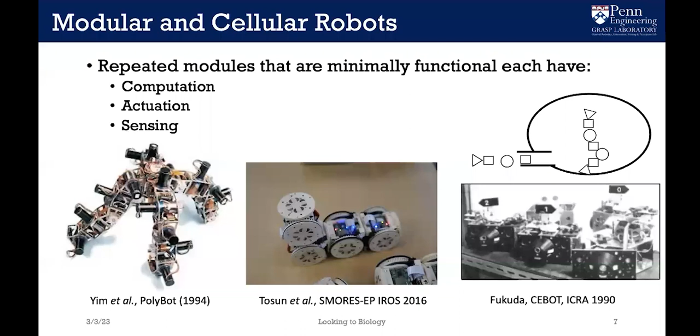Each module can do something by itself, but not very much, and it becomes much more capable as you add more of them together. So let me just show you a couple examples for locomotion.

Here's maybe 6 modules kind of hopping around.

These are another set of modules that you can roll like a loop, again doing different types of locomotion. It can also transform itself, open up, and move like a snake.

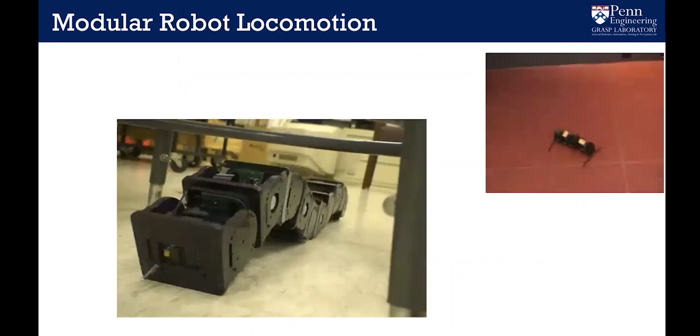I'll talk a little bit more about snake-like locomotion. You could also have a little 4-legged locomotion.

This is actually taking a snake-like form, and we put it in a gopher hole outside, this was when I was at Xerox PARC.

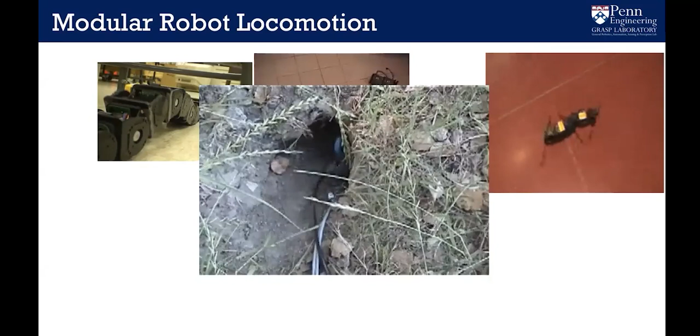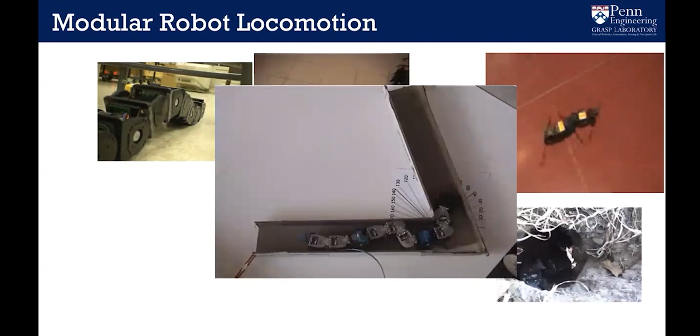The gait it uses inside that hole is called a concertina gait. This is blind, there's no force sensing or anything, it's just moving in a certain pattern and eventually able to make that sharp angle.

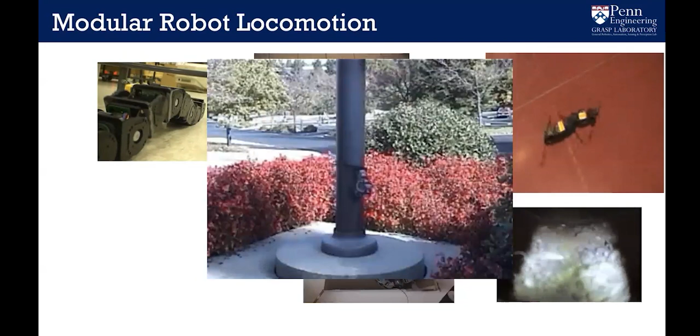It can also do a variety of climbing. Here it's climbing up a flagpole if you put the right attachments on the robot. It can also climb fences if you attach little hooks onto the robot.

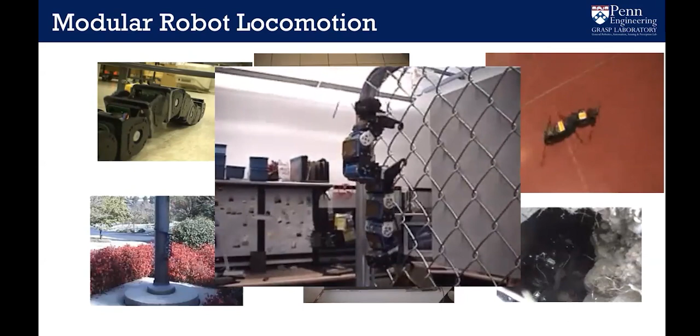Climb stairs. In this particular gait, it's conforming to the shape of the stair, and that one works quite well.

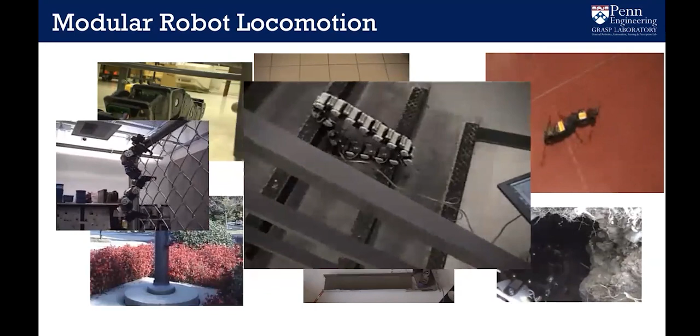This one is also interesting in that it's using human-like equipment, but it's not in a human form, which I think is important. You don't necessarily need to be in the human form to use human equipment.

A lot of times people talk about humanoids being really important because you want the humanoid robot to be able to use human equipment, but that's actually not necessary.

So this is what we call a 14-legged centipede gait. Sometimes I hear biologists say it's not a centipede, it doesn't have 100 legs. Well, centipedes don't have 100 legs either, but in any case, this only has 14 legs.

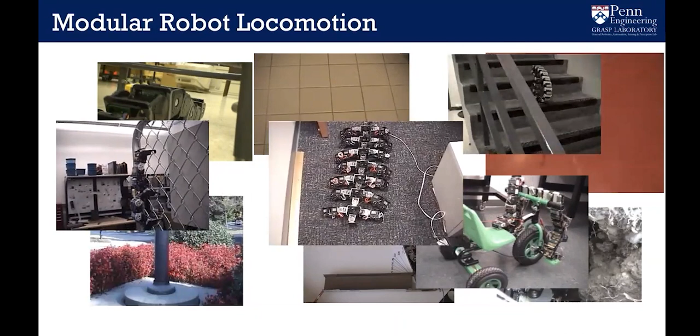The significance of this particular gait is that it's the largest number of modules we put together in a single system that could actually do something. It can kind of walk, and we'll talk a little bit more about that later as well.

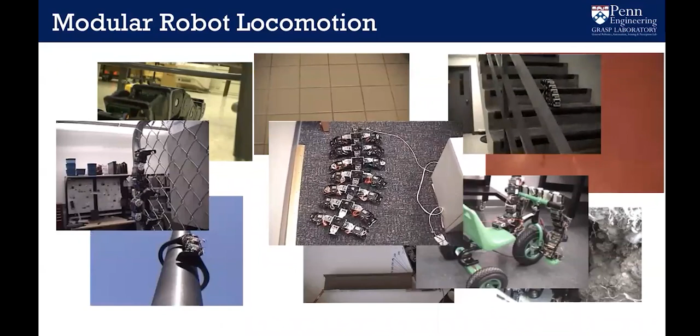All right, so we can do a lot of different things, and we've done hundreds of different gaits.

One of the things that when you have this type of robot, you could say it's kind of like Legos, you can build anything depending on what you want to do.

One of the things people often say is if you need a larger workspace, if you need the robot to have a larger reach, add more modules, you can make longer arms and increase your workspace.

If you need more strength, you could theoretically add more modules, put modules in parallel. They can distribute the weight or the forces for whatever you want to do. If you wanted more versatility, add more modules.

The number of configurations grows exponentially with the type of combinations you can do with modules. So more modules means more things you can do, but in reality it doesn't quite work out so well. When you have a larger workspace, you need larger strength. There's something we call characteristic strength, the number of modules a robot can support against gravity in a cantilever form. The characteristic strength of modules like we built is around 3 or 4, sometimes 5 or 6.

You could theoretically make them stronger by doing things in parallel, but the way we build them, it doesn't work that well. You could theoretically build a soft module that has some type of torque control, so you can actually share the load. The way people typically build these modules is position control, servos, relatively stiff, so when you put them in parallel, they don't work so well.

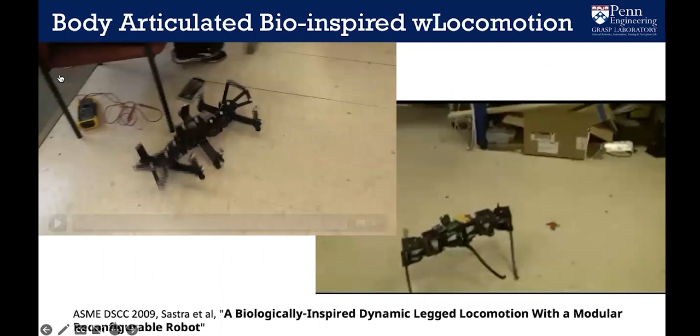Okay, so here is an example of a new type of more biologically inspired gait. In this particular one, it's just the spine of the body that's articulated, so it kind of moves maybe like a salamander or other type of lizard, but it's also dynamic. The legs are springy, so it's bouncing as it goes.

This is a version of that that didn't quite work so well. At this point, we're experimenting with different lengths and stiffnesses of the legs that were passive. It kind of bounces around, but maybe it's too high. So what's the right speed? What's the right stiffness? How do you do that? There's a lot of optimization you could do on this.

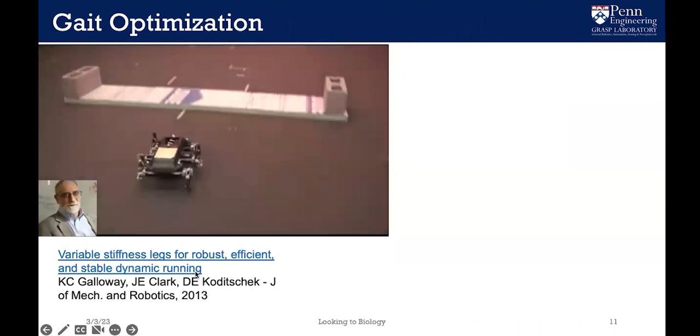So one of my students worked with Dan Koditschek on RHEX. This is a very old, famous robot called RHEX, Rex, with 6 legs that are also somewhat springy. How many of you have heard of Rex? Have any of you heard of Rex? A couple? Okay, so for those of you who haven't heard of Rex, this is kind of really cool.

Dan Koditschek worked with Bob Full out at Berkeley several decades ago, and they looked at cockroaches, studying how a cockroach climbs over obstacles really, really well. When they did high-speed video and analyzed it, a cockroach doesn't think about where it's pushing each foot as it goes. It just swings its leg wildly, climbs over obstacles, and it just works. It just bounces over things really, really well.

And so they realized they could do kind of the same thing. If you have the right motion with the legs, with a little bit of springiness, it just goes over unstructured terrain really, really well, and RHEX was one of the examples. So one of the things that was kind of interesting they did was figuring out how to find the right springiness.

They spent a little bit of time trying to optimize the gait and the stiffness. They had changing stiffness legs, all this kind of stuff. So Kevin Galloway, my student, worked with Dan using the Nelder-Mead optimization technique. They went through maybe hundreds of physical trials and then thousands of simulated trials, and they got something to work pretty well.

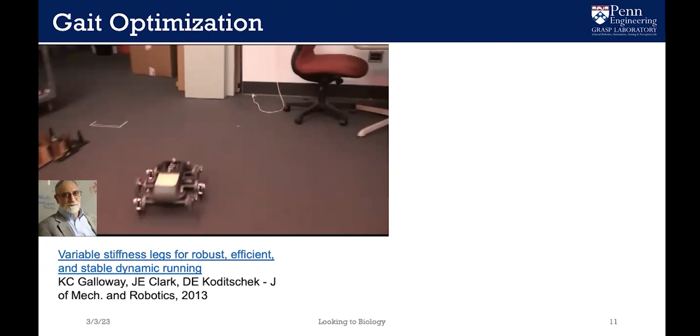In this talk, one of the things he showed was a quadruped doing, again, essentially gait optimization, walking around using a learning technique. One of the things they showed was that this robot could walk slowly, and as they speeded it up, it would naturally transition to a trot gait, and could go over different types of terrain, all kinds of things. That was pretty amazing, and one of the things I found interesting was what he talked about enabling this to happen, as opposed to what happened 10, 15 years ago.

Instead of having thousands of trials in an optimized gait or using learning techniques with large data sets that fed their model, instead of thousands, they had 100 million iterations. They have now the compute power and resources to do that type of thing, and once you have that, you can have much greater performance, which is kind of interesting.

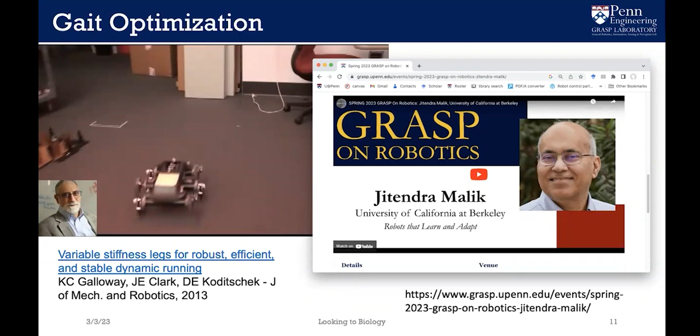Okay, so this is basically the structure I'm going to have. I'm going to talk a little bit about some robots, and then have a slide on what did we learn from biology. This is kind of my take on working with modular robots and doing a bunch of different gaits over the past couple decades.

We've done hundreds of different configurations. Most of the time, most of the configurations had less than 12 modules, usually like 5 or 6. The largest number of modules we had was the centipede gait with 45 modules, and that was just because we wanted to see how many modules we could put on a robot. How it worked was actually not very good — it could move in a straight line, kind of, but not that great.

One of the things I took away from looking at these somewhat biologically inspired locomotion gaits is that, in general, more modules led to worse performance. Essentially what you want to do is match the number — it's like an impedance match in electronics. You want to have the right complexity, the right number of modules or degrees of freedom that fits the complexity of the task.

So one fallacy, maybe, when you think about modular or cellular robots, is that like cells in your body — you have billions of cells but only hundreds of types of cells. There are lots and lots of cells, but it's not the same thing when you think about a modular approach.

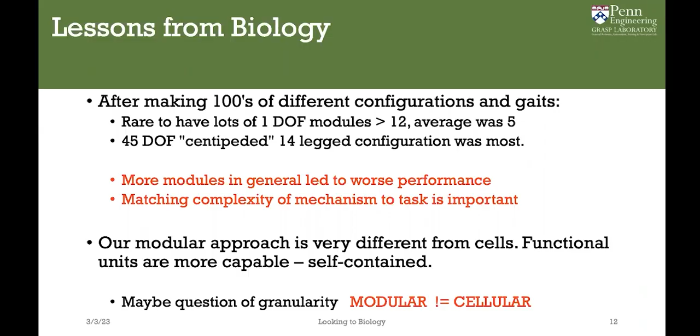Another thing when we think about modules is this particular gait where we had the tricycle with modules on it moving. This is another thing where it kind of worked — we got the video, but it didn't work that well. There are something like 20 modules on here; you only need maybe 2 or 3 degrees of freedom, but we've got 20 motors, and essentially every module here is like a muscle. In that sense, it's kind of like an octopus. So having all of the same type of module is not necessarily a good thing.

Octopi are really amazing animals. They can squeeze through areas and have very good ability to move around and do things like that. But they're really bad at lifting things, because, imagine, they have no bones.

Imagine I'm standing here and all my bones were gone — what would it be? I would be a puddle of flesh on the ground. I wouldn't be able to move, I wouldn't be able to stand or walk. Bones can be really useful when you want to do things like apply large forces and torques in an environment.

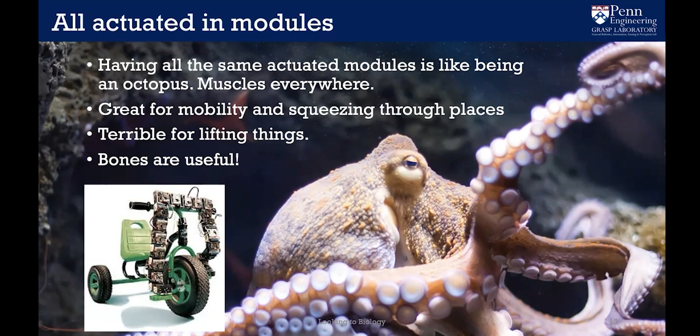Looking at that got us to think, well, maybe we shouldn't have modules in the sense we've done in the past. And that got us to start the thing I'm working on now, which is a little bit more recent, and an area that scales better: something we call truss robots, or variable topology truss. Essentially, what it's doing now is also what in the past has been called a variable geometry truss.

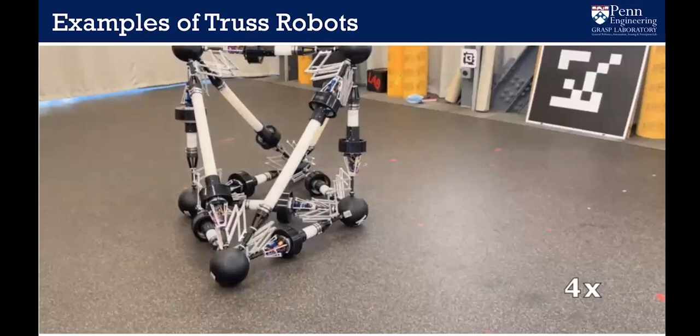So it's a truss where each link can change its length, and you can do things like this: walk around, tumble, that type of thing. There are much more interesting computational issues with this particular robot system.

So you can have arbitrary structures. This just shows a picture of how you might represent the nodes and the edges of a graph. You can represent it as a graph. This particular system also can change its topology, so it can rearrange the assembled nodes and truss members.

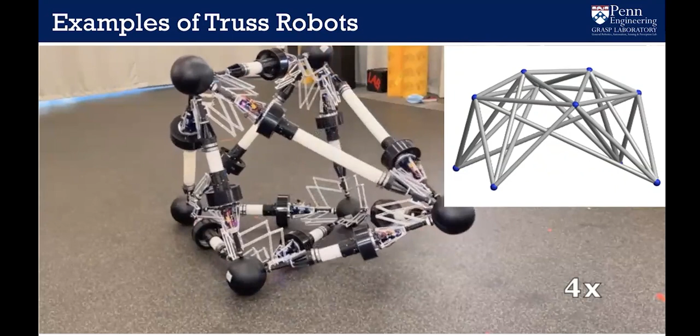So here's a typical motion planning problem we have with a truss. We have a truss in this shape and another truss in this shape. You have to have the same number of nodes and edges. Is it possible for this one to go into that shape without self-collision?

It turns out that self-collision is a really difficult thing to deal with in a truss robot with this many members, because it happens all the time. Anytime you move, it's very likely that your members will collide together. It turns out, in this particular case—actually, let's just take it.

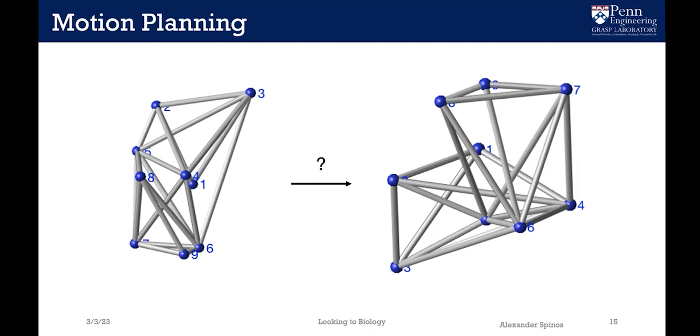All right, so a third, fourth, that's good. So it turns out it can.

Let's see if I can get this video to go. Okay, so this is the motion that the nodes and the members have to go through to do it without colliding. So this is fairly convoluted, and my student had to work pretty hard to find a way to get it to be this complicated.

It turns out that for a truss that looks like this, it's rare that you can have something that drastic in terms of motions. If you look at the C-space, there are 25,000 disconnected regions. The collision happens a lot. So given two arbitrary configurations, there's less than a 3% chance that you have a path between the two without collision.

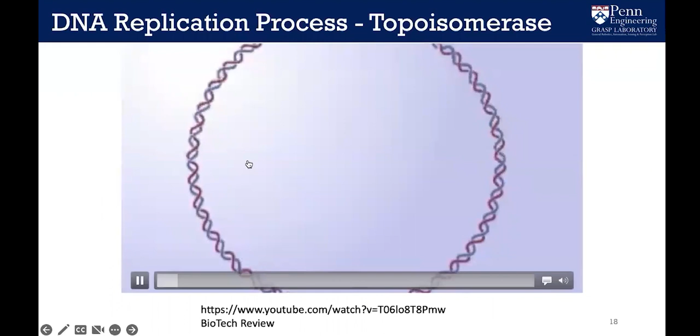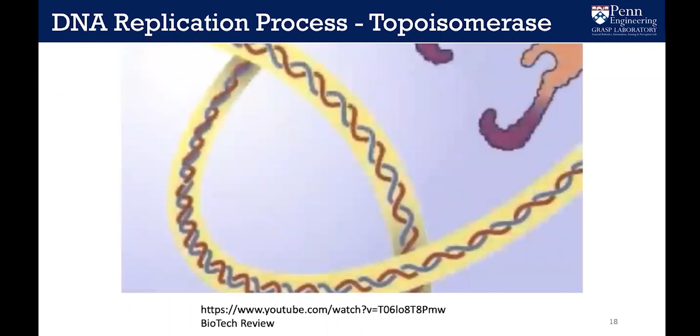So for biological inspiration, we actually looked at DNA. There's this thing called Topoisomerase, this little enzyme that, when a DNA molecule replicates, comes in and actually breaks apart the DNA chain and then reassembles it. The DNA molecules get coiled up a lot, and in order to replicate, they need to uncoil.

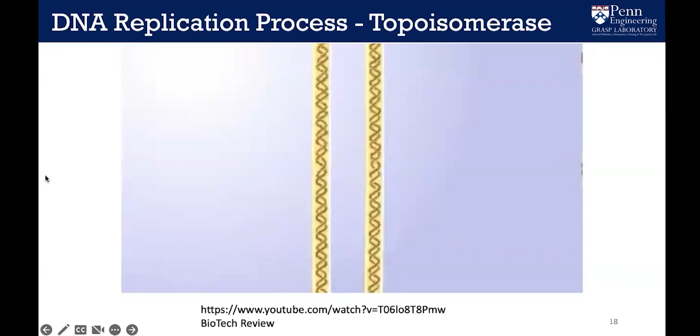So there's this thing that just comes in and breaks it apart, uncoils it, and then reassembles it—and it works. Of course it works. People have their replication all the time, so it's kind of amazing.

We have a paper on how we can do kind of the same thing with our system. In this particular case, this diagonal element is in the way. It's impossible for the robot to move from one configuration to the other without bumping into this particular bar. But if you split in two, you can actually move around that one and then reassemble on the other side.

Another tool that my student Alexander Spinos came up with is inspired by knot theory. One of the things you want to do, if you look at a really complex configuration, to determine whether you can move from one place to another without collision, is to look at the different links, the closed chains. Here we have one closed chain, another closed chain, and another closed chain—actually different combinations of closed chains, some of which are linked together.

If you needed to break out of it, you can't, without reconfiguring, without breaking open the nodes. So using what's called a spatial graph—a kind of derivative from knot theory—you can have a 2D picture where the crossovers are shown in 3D by showing a gap on one side or the other.

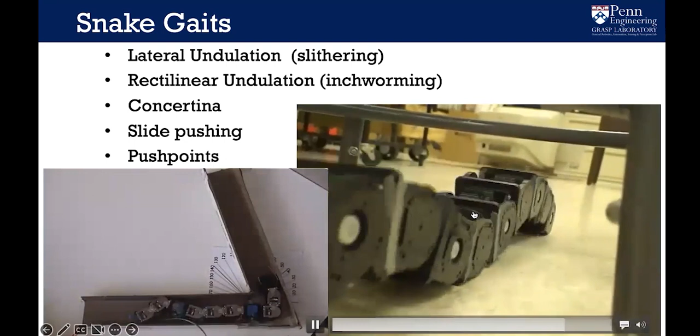Okay, snake locomotion. There are essentially 5 different types of ways that snakes move. There's rectilinear undulation, which undulates in the vertical axis. This one is concertina. There are 2 others, slide pushing and push points, which I'll get to in a moment, but the most popular one people think of is lateral undulation.

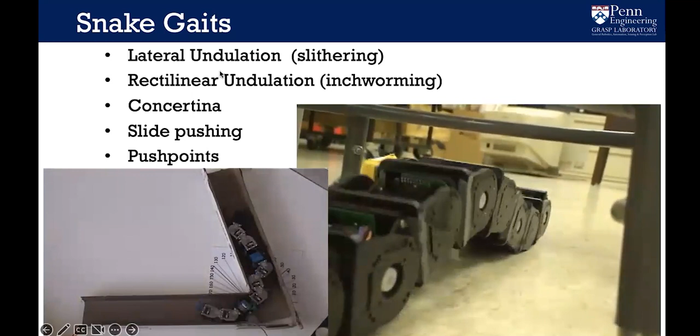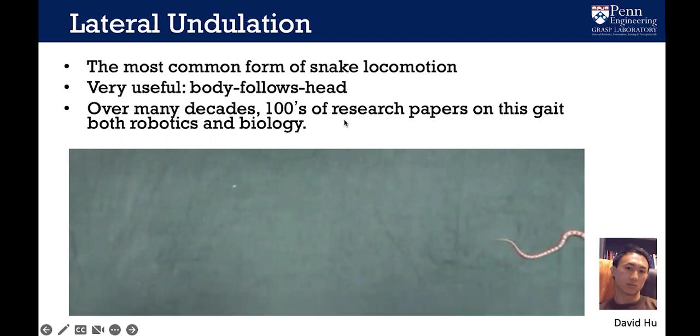So this is lateral undulation—snakes moving in the horizontal plane, undulating in the horizontal plane. This is actually a video from David Hu, a very interesting biologist at Georgia Tech, who showed me some of these things. There have been a lot of studies of lateral undulation.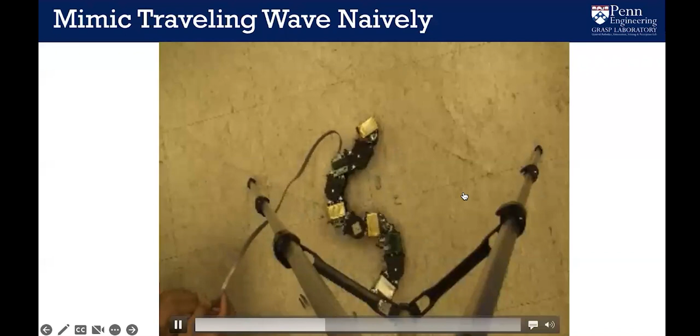So if you take that motion and get a robot to do it, this is what happens. In a naive way, we have a modular system with, I think, 4 or 5 modules in the plane. It doesn't move properly, it doesn't move like a snake, it doesn't make any forward progress—it just sits there wiggling in place.

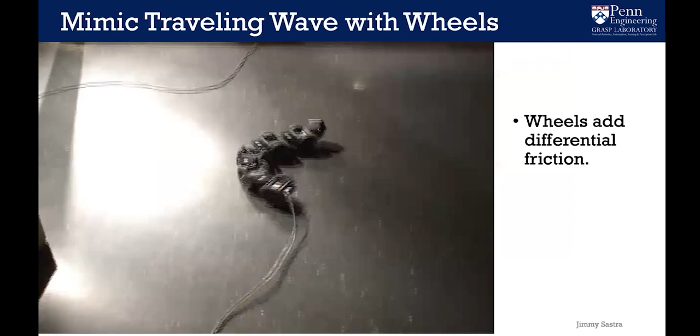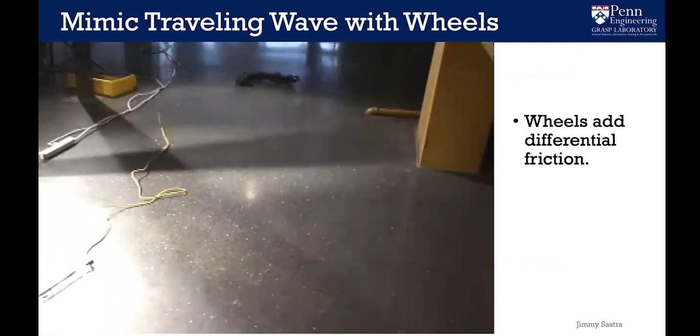One thing that might be the case is something called differential friction. If you put wheels on a robot and make the same motion, it works really well—it moves very much like a snake. So the problem is that snakes don't have wheels. So why is it that snakes can move and the robot can't?

I just found this on YouTube—it's some random guy with a pet snake who decided to videotape it. Here the floor is kind of slick, so this snake isn't actually using that type of motion either. It's something called slide pushing—it bunches its body up and then sticks out a little more.

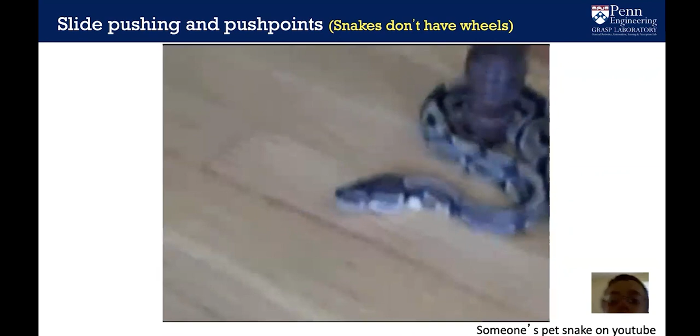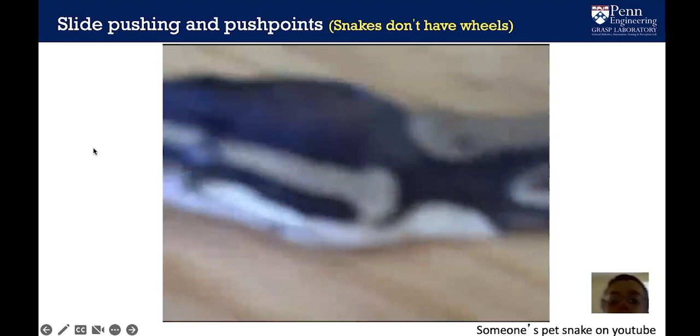But here's something really interesting: the snake intentionally went to that particular post and wrapped its body around it in order to push against that post. That's what's called push points—using vertical features in the environment to push against in order to make progress.

There have been people that use this type of push—they've done studies on snake robots that do the same thing. This one's a really funny one; I'm not sure why this snake was doing this. It's a very slick surface, and it's not making progress, and it's not using those other 2 techniques either.

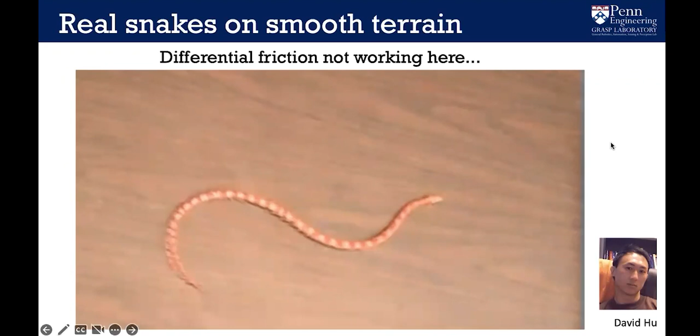But there's a thing called sinus lifting, which is a way a snake can move, and that's what's happening here—we've added the ability to move in the vertical plane as well as the horizontal plane. If you notice, this part of the robot, and this part, and this part are not touching the ground. The only parts touching are these 2 parts.

And if you look at a real snake here, you can see it's doing the same thing. There, the parts are above the ground. Part of the robot is up and part are not, and that's how it actually makes progress.

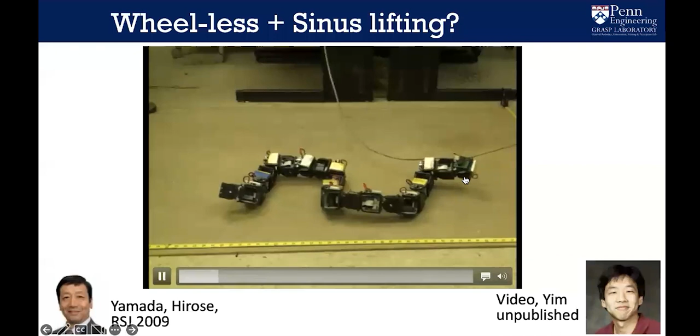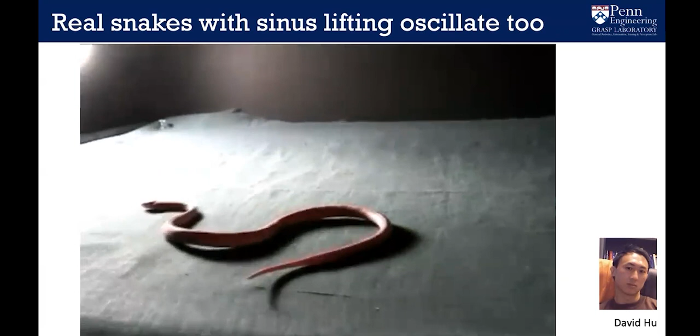One of the things that's funny about this particular gait is that we have these wires in the back. That's because as it was moving, it wouldn't always go straight. It tended to kind of wander or oscillate or turn in funny ways, and that's kind of a problem. And then when we looked at this video, actually the snake is kind of doing the same thing. It's kind of wandering around, and maybe that's just how it does it.

Okay, so this is biomimicry. It's just trying to copy biology, and so what can the robots teach us about biology? Essentially, for lateral undulation, it seems like there are two major mechanisms: there's differential friction, and there's this sinus lifting. There have been studies on snake skin where under a microscope they noticed these little features which give friction in one direction different from friction side to side.

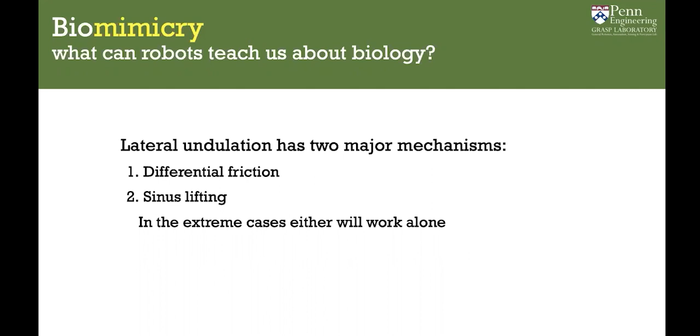Just one other side topic for all of you PhD students: this particular stuff I'm showing you here is work we put two or three years into and then didn't publish because it turned out someone else had published it months before we did. So that's one incentive to publish things early, because waiting can be a bad thing. Well, you'd like to get credit. That's why I'm talking about it now, because I wasn't able to publish it either. But anyway, it's fun stuff to do. All right, any questions on that before we go to this third topic?

Okay, under-actuated swimming and under-actuated flying. So the first thing is this, another project where we have what we call Modboats. These are boats that can form larger structures in water. They have magnets on the sides, and if they get close enough to each other, they can dock by using the magnets. They can also swim together.

Doing the control was one of the big things: how can you get them to move together in a coordinated fashion? In order to dock, you need fairly precise motion to get close enough to dock. So we had to figure out how to get them to move together. This particular one, this is the bottom side of what it actually looks like.

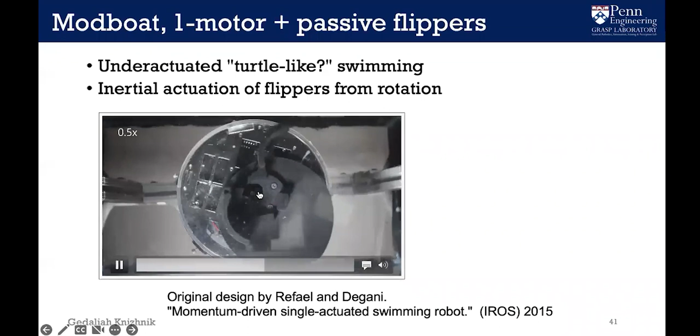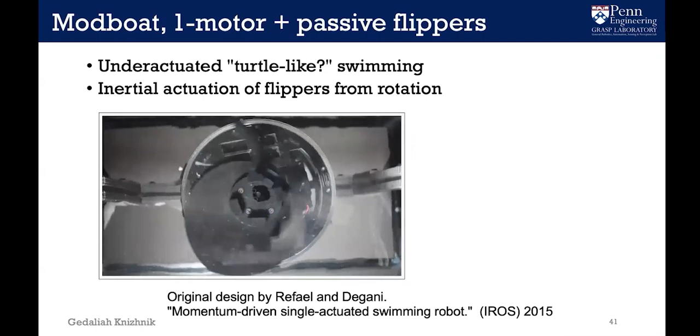This is where it kind of looks like a turtle swimming to some extent. Essentially what happens is the design has one motor, so that's why it's underactuated. There are these passive flippers that, as the motor just twists the thing back and forth, flip out and grab the water to make progress. This was actually designed by Refael and Degani a while ago, which we thought was a really cool design, so we copied it and then built on it.

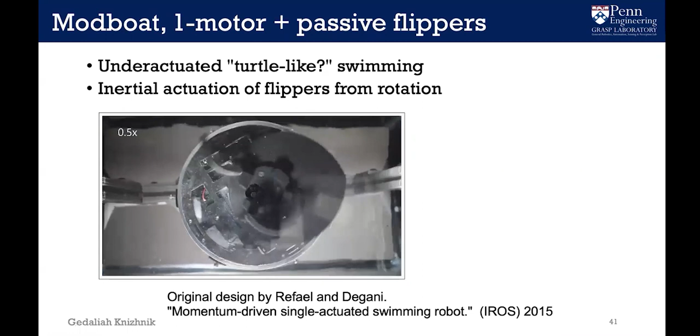One of the ways of steering with this thing is essentially you can model the forward progress as sinusoids, or a cosine function with an amplitude. If you want to steer it, the way Refael and Degani did, and the way we implemented it, was to change the speed it's moving. So this represents just the angle, and this is the sinusoid, the angle as it rotates back and forth. One side is like the left flipper and the other side is the right flipper.

By changing the speed of either the left flipper or the right flipper, you get this type of motion here. This one's faster on, let's say, the right flipper, so this orange section is turning one way and the yellow section is turning the other way. And that works, kind of. It's also fairly straightforward: if you look at the equation of motion for how we're controlling it to move, the natural thing is to say we can just change the frequency. It's parameterized in a way where it's easy to change the speed by changing the frequency of the left or right side as you go.

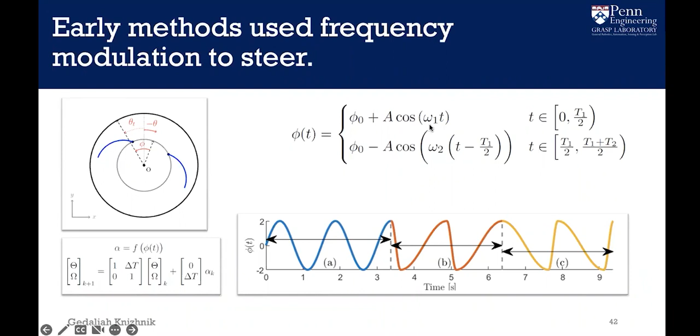Another way to do this is by what we call a pause controller. So instead of changing the speed, we put a pause in the way, either after it's moved with the left flipper or after it's moved with the right flipper. This one is a little bit trickier because it's discontinuous. The controller is discontinuous. You don't have a single function.

But if you think about it, if I'm sitting here swimming along, paddling left and right, and I want to go to the right, I could swim faster with the right, or I could just hit it once and then drift and turn to the left or right. I think it's a little bit more natural to do it this other way, the pause controller.

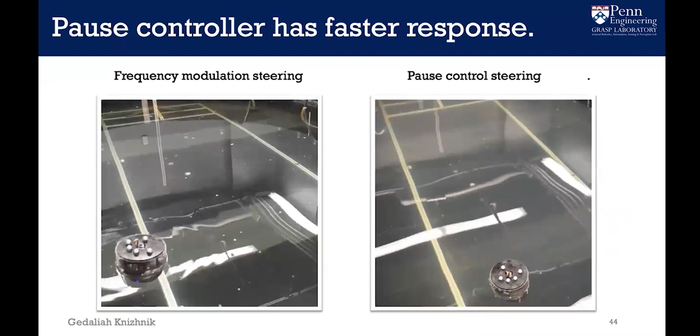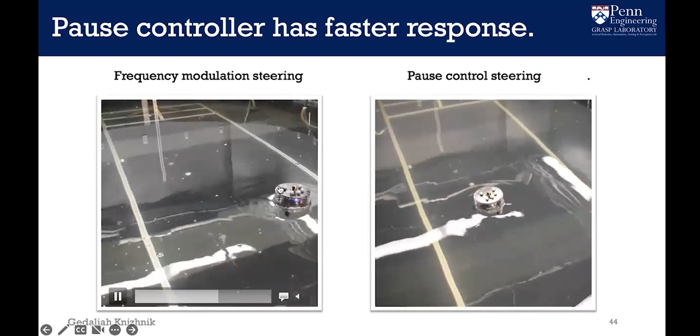So if you look at the way that it actually performed, this is the pause controller, and here it was going to the right, and now it's going vertical, and it just basically made a right angle relatively quickly. This is what we call the frequency modulated steering. It took a long time, it took this big arc. It's much, much slower in order to turn. It's not quite as effective.

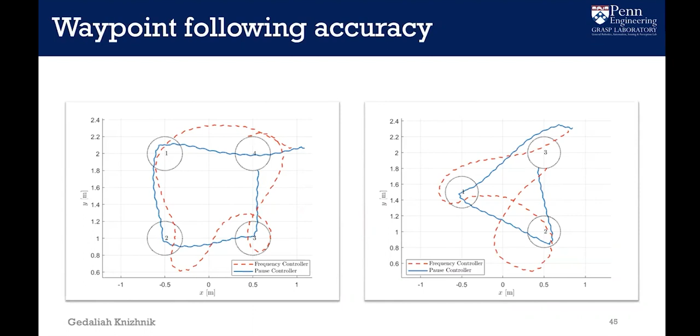We'll talk about the results of this in a minute, but basically frequency control didn't work well and the pause controller did. I think the pause controller, to me, seems to make a little bit more sense. We'll get to that in a minute.

First, let's talk a little bit about underactuated flying. Has anyone heard about this? You know, the myth that bumblebees shouldn't fly if you use classical aerodynamics. Apparently, if you look on the internet, supposedly some engineer a long time ago said something like that, using normal aerodynamics analysis, bumblebees shouldn't fly.

Part of that thinking, I think, comes from low Reynolds number flow. When you shrink things down, the viscosity ratio of viscous forces to inertial forces changes. And there's another myth that insect-sized propellers can't work because they're too inefficient at that scale.

So as you shrink propellers smaller and smaller, you need to go to this flapping wing, like insects do. There's a lot of research now. A lot of people have been trying to get insect-level flying, and they've been looking at flapping, and there's all kinds of really cool stuff looking at the vortex shedding in order to increase the efficiency of flying, and they've got a lot of things flying with flapping wings, even at the small level.

So I talked to this guy, David Lentink. I forget, he used to be at Stanford, I think he's at Duke now. Anyway, he's at a different place now, but he basically studied these things, and he said, actually, no, propellers will work at a much smaller level.

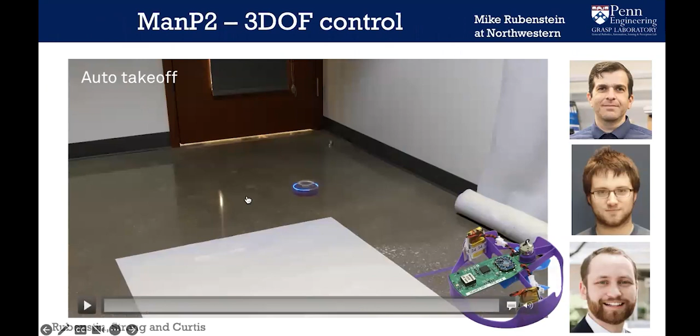One of the interesting things is, how does it actually work? It only has one motor. So how do we control it so it can go X, Y, Z?

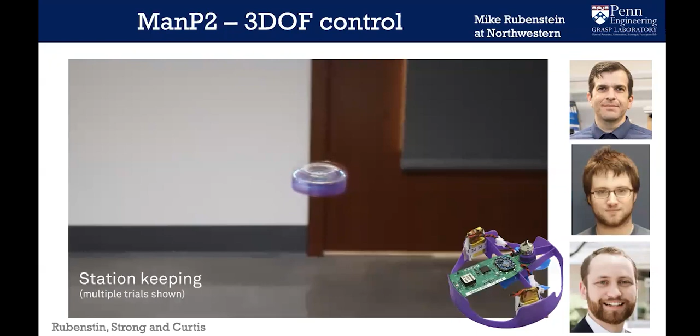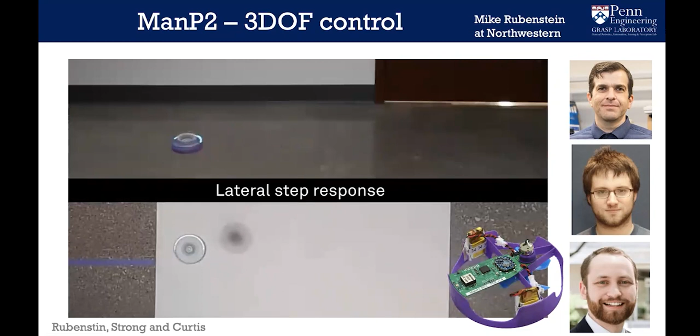Here's some collaborators at Northwestern, Mike Rubenstein and his students. We can do station keeping, we can do step responses vertically, horizontally. The light you see there on the edge, the little LED, shows when it works by pulsing the propellers, and the light shows when it's propulsing at different points in the rotation.

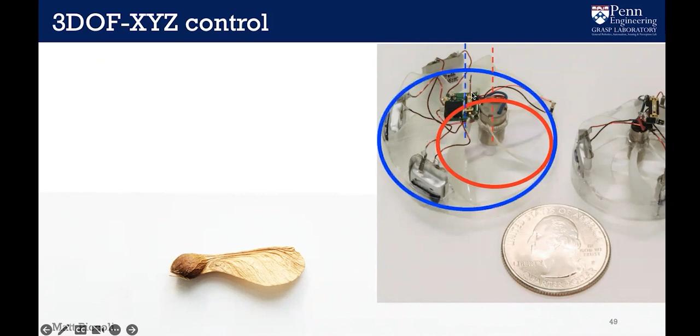So how does it work? This is kind of a close-up version of the system. There's a motor with a small propeller, it's a white propeller here. This kind of shows the axis of the motor. It's not in the center of the robot, the center of mass is actually offset.

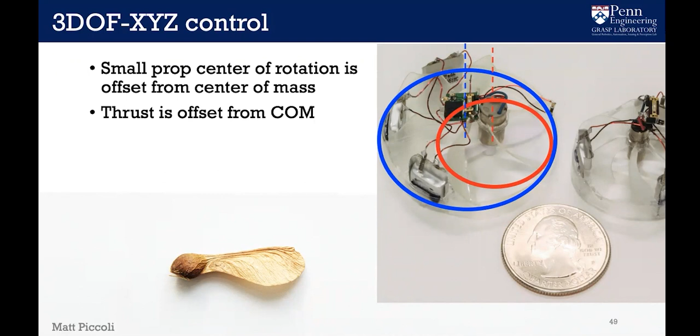So because it's offset, the motor is also spinning in addition to the propeller spinning. What we can do is we can pulse the motor at different points depending on where it is in the rotation, and that will cause a moment, which will lead to an angular velocity. So we can control the roll or pitch, or the attitude of the vehicle as it's flying, and that's how we control its X-Y position.

So one of the things that actually took a long time to figure out and to get right was the distribution of the masses.

So it turns out one way to think of it, it's not exactly what we did, but you can kind of think of it like a maple seed or samara. In order to get passive stability, like when a maple seed falls, it spins in a way that's passively stable. It doesn't fly and crash in a different way, it essentially becomes passively stable. We can use the same type of mechanism by having the masses in the right place.

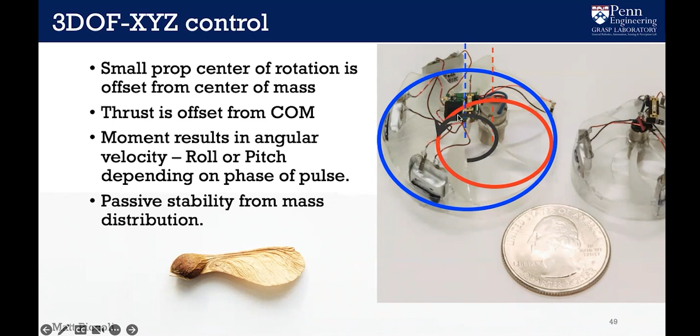All right, so looking to biology, one of the lessons I think we have is don't follow biology blindly. We don't have to have flapping wing vehicles, even at the small side.

And the other thing is, don't follow mathematical intuition blindly either. So my student did this control law and said, okay, we have this parameterization, we want to do control, it's pretty obvious, pretty easy to just change the speed, and then you can get this controller to work. Whereas the pause controller, actually I think, works much better.

Okay. Any questions on that? All right, so yeah.

What was the claim, that something that doesn't have flapping wings cannot fly at that scale? Was that the original claim? All right, okay, just to clarify. All right, thanks.

Yeah, especially propellers, spinning propellers.

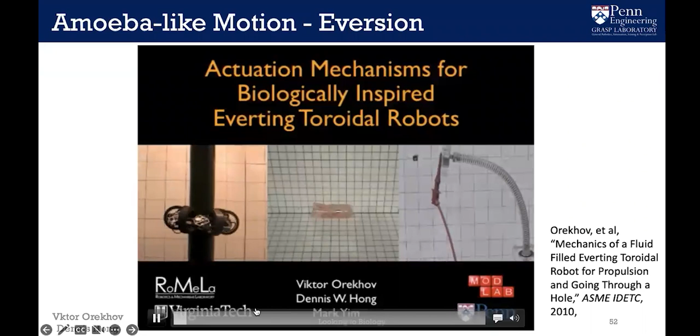Amoeba-like locomotion and amoeba-sized locomotion. So here's this work on essentially looking at the way amoebas move, which is kind of like you can see material from the backside squeezing out the front side, and that's the way it kind of moves around. It kind of oozes. And there's a thing called the water wiggly, a little toy, a toroid filled with water, and as you push one side, material will go through the middle and out the front.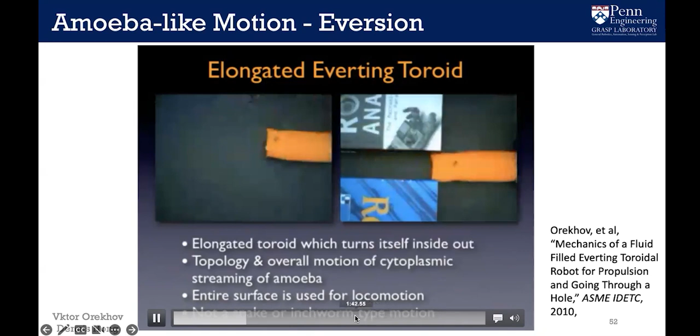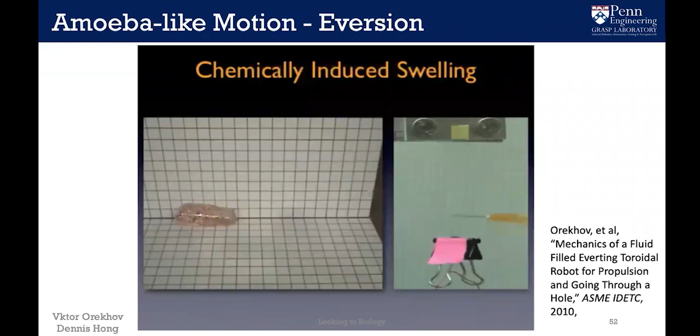So essentially what we did was, Dennis Hong and I and one of his students came up with a way of chemically inducing swelling so we can get that same type of motion. Applying a certain type of, I think it was hexane or something, on the backside of a polymer, you can get the robot to shrink and change its stresses on one side. We wrote a proposal to DARPA for the ChemBots project, where we would essentially have some way of chemically getting this thing to move by applying chemicals to the right places. It didn't work that well, we could get it to move once, but the chemical stuff didn't really work that well.

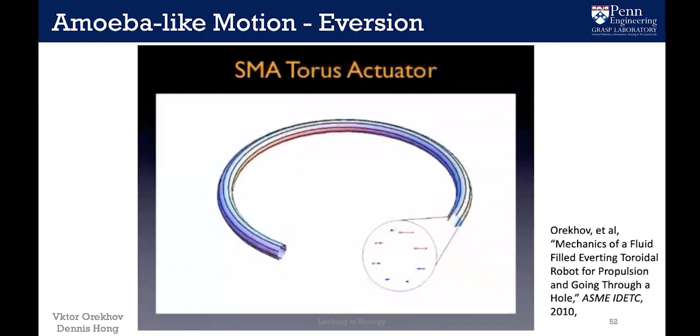There is another robot system that also uses what we call eversion, and this is the Vine robot. Elliot Hawkes and Allison Okamura and her students came up with this idea where you have a bunch of plastic material inside the robot, and it squeezes out the front part, and you can get this thing to grow out the front end and squeeze through tight areas, and it works really well.

So there are probably four or five groups around the world that are pushing this idea. It can go over long distances. It can also, if you get it to squeeze under some object and then pressurize it, you can actually have large forces to lift it up as well.

Steering at the front, steering of this thing that's growing out, is not that easy. You can do it, but it's not that easy. Applying forces, arbitrary forces, you'd like to think of it as like a long robot arm, but getting forces out at the tip is not that clear either. But it is kind of an interesting system that uses the same mechanism as an amoeba, and it works really well.

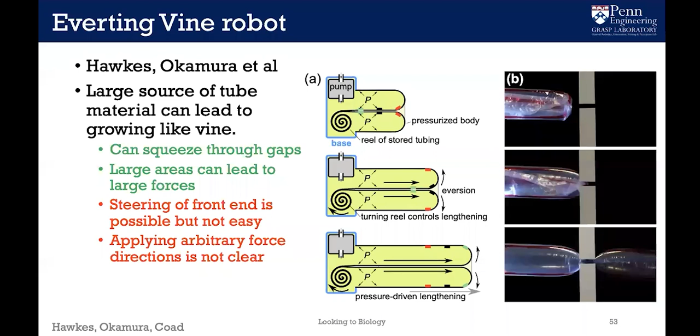Okay, so the last part of this talk, I'm going to talk about this new work. We just submitted a paper, the IROS deadline was a couple days ago. So we just submitted this, it's not published yet, but it's, I think, really fun. So I'm going to talk about it here.

So essentially what he did is he solved two problems that were difficult for all the people trying to do micro robot development: making teeny tiny actuators, little tiny motors, was difficult. He came up with these little electrochemically actuated devices, you apply a voltage and current to this material and it bends. And then he also solved the power problem. The other big problem is power, and he does that just by shining light. The actuators take a very small amount of energy, so you can get this thing to work.

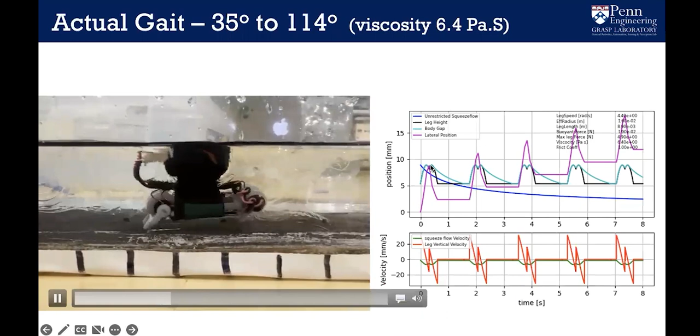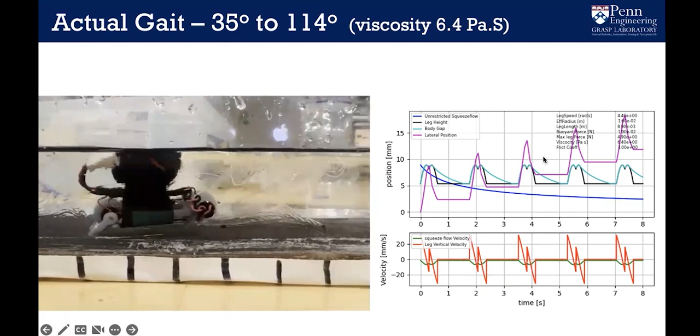So if you put that model in, this is what the simulator shows. This magenta line shows it makes some progress forward and then backward, and then we wait, we pause. During this pause, this green line shows the body falling, and ultimately you make progress going forward and back, but it works pretty well.

So the other thing we can do with this simulator is design and optimize what the gait might be.

So I'm not exactly sure about the scallop theorem question. Yeah, so the scallop theorem just tells you that if you are in a high viscosity environment, so typically zero inertia, then you cannot have any thrust or displacement if you don't break symmetry. If the scallop does this symmetric motion, you cannot move anywhere. But the consequence is you need to break symmetry so that you break the reciprocity of the motion.

Isn't it this exact same thing? It's exactly the same thing, yeah. And the ground contact is what breaks the symmetry. Exactly. So I was just puzzled by the fact that it's kind of a new mode of locomotion. I thought from a fluid dynamics perspective, this is...

So the critical thing here is it's not swimming, this is walking. No, that's fine. Well, but it's still just one way to break symmetry. You can also do the same thing if you hover over a surface and have a boundary effect coming from the wall. That's another way in which you break symmetry and can move into a viscous flow. So I'm just trying to clarify how this fits with classic fluid mechanics. All right, okay, thanks.

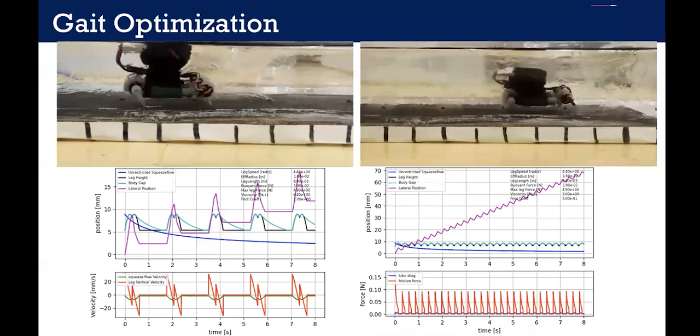With this model, one thing we can do is optimize the gait. Here's the old one that moves at something like a millimeter per second. It turns out this pause, waiting for the fall, slows the gait down. If you change your start and end angle, you can move much faster. Here there's no pause, it starts in a certain position, and the legs move much faster, but all at an angle. You can see it actually moves about five times faster than the previous gait. So we can optimize the gait.

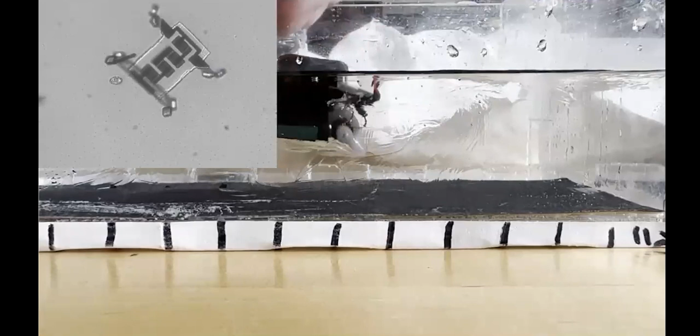Then the real question is, how does it match with the actual microscopic robot? In this particular case, there's a front end in the air, so theoretically it's not moving, and the back end is what's actually moving back and forth. We can model that as a rotation. This is much closer to the actual scallop theory, so there's an angular velocity of the body, and there's a translation.

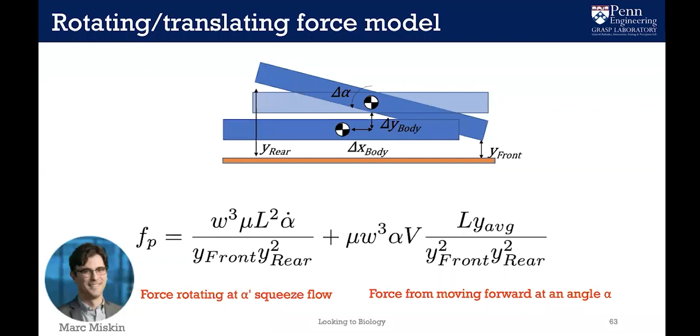This is the equation that Marc Miskin came up with. The first term is the angular velocity squeeze flow, and the second term is just moving at an angle. The second term is interesting because the thing is moving back and forth as the leg moves back and forth, and if you're at an angle, the force up is in the opposite sense as the force down because you're moving at this angle. Theoretically, we can exploit that to improve our gait.

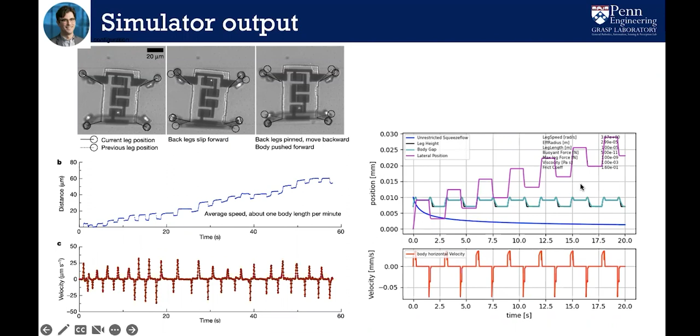Modeling what they actually did, this is from Marc's Nature paper. You can see this is the forward progress - it moves forwards and then backwards, and ultimately we make some progress, and we get basically the same type of behavior. So building on that model, we now know that the vertical component of the motion is really important to understanding how it moves.

So we can start thinking about what if we have multiple legs. If we've got multiple legs, we can start doing things like turning, which is one thing most micro robot people don't do - they just say, look, we can get the robot to move straight. But if you actually wanted to get someplace, you probably want to drive it in a certain direction. So having multiple legs, we can start thinking about how to coordinate its motion, which is coupled because of the vertical motion up and down.

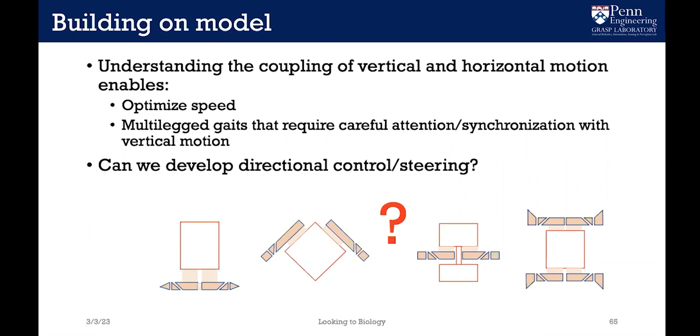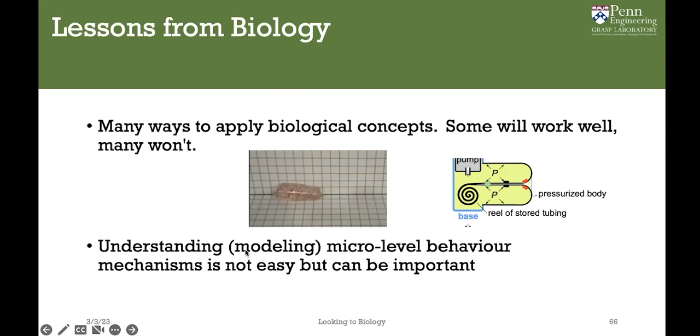Lessons from biology - basically this applies to most of everything, I guess - there are lots of ways to apply biological concepts. Some will work well, like this Vine robot, and some probably won't work so well like we had tried before. Understanding and modeling the micro level behavior of mechanisms is not that easy, but probably important.